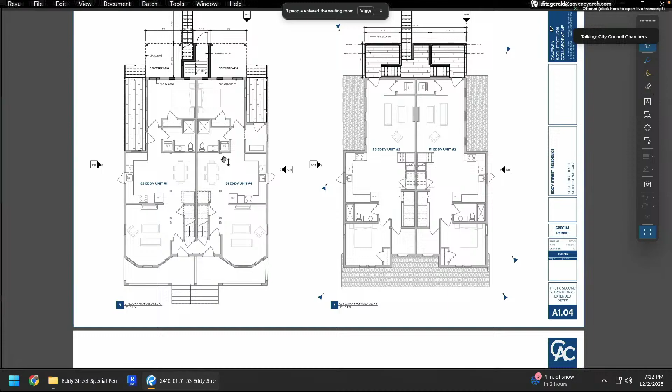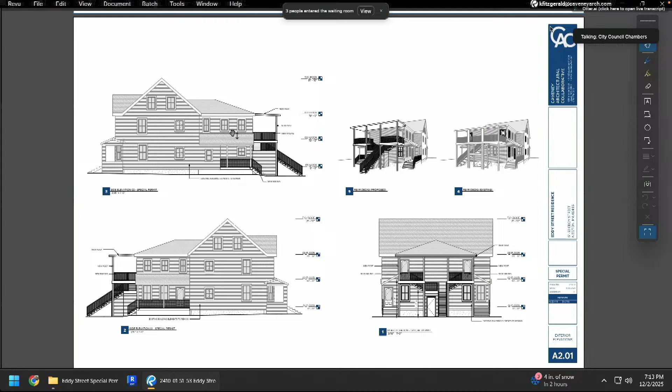As noted in the planning materials, the decks are located at the rear of the house with limited visibility to the street. Therefore, the changes will not substantially be more detrimental to the neighborhood than the existing structure. The proposed work fully complies with the dimensional standards for the zone, including setbacks, lot coverage, and open space. By modernizing these egresses and creating private outdoor space, we believe the project serves the public convenience and welfare by improving the quality of housing for the tenants of the house.

Here's an example of what the existing decks looked like. And then up here is what we're proposing on the left side.

We respectfully request your support for this special permit to alter and extend the non-conforming use.

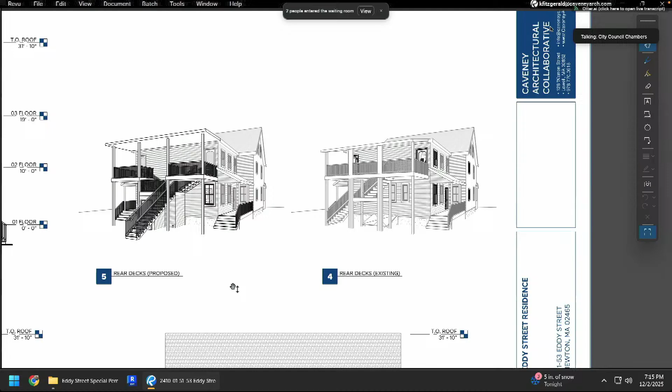And then a motion to approve. Could we take a look at the findings and conditions, Ms. Kemet? I was muted. I believe you should be able to see that now, hopefully.

Thank you. So for findings, we have one: the proposed extension of the non-conforming use will not be substantially more detrimental than the existing non-conforming use is to the neighborhood, because the work will comply with applicable dimensional standards. The decks will be located at the rear with limited visibility from the street and are unlikely to have a more negative impact on abutters and the surrounding area than the existing rear deck.

And for conditions, we have our standard conditions here referencing plans, which is the site plan and the architectural plans. Standard building permit conditions requiring a recorded copy of the special permit and sign off from planning. And we will review again at occupancy for the building permit to certify compliance with the plan referencing and requiring a final as-built. And that concludes that. Thank you, again very straightforward.

Councillor Wright: just one question. I'm trying to look on the website and stuff. So this is 348-25, and when I look in the Friday packet, I didn't see the draft council order for that. It's also helpful when they do the draft council orders to put the address on it. Oh, it's in the compiled memo then, I guess.

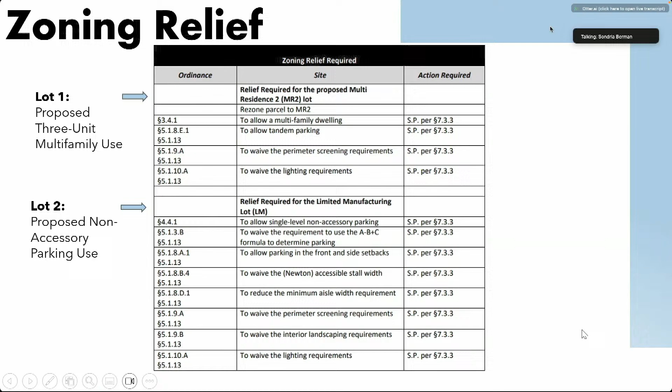So our criteria, again, to consider in reviewing the proposal for Lot 1: we have the standard 4 criteria for special permits, which is that the site is an appropriate location, that the dwelling as developed and operated will not adversely affect the neighborhood, that there will be no nuisance or serious hazard to vehicles or pedestrians, and that access to the site over streets is appropriate for the types and numbers of vehicles involved, and that literal compliance with the required parking stall design standards for Lot 1 is impracticable due to the nature, use, location, size, width, depth, shape, or grade of the lot, or that the exceptions would be in the public interest.

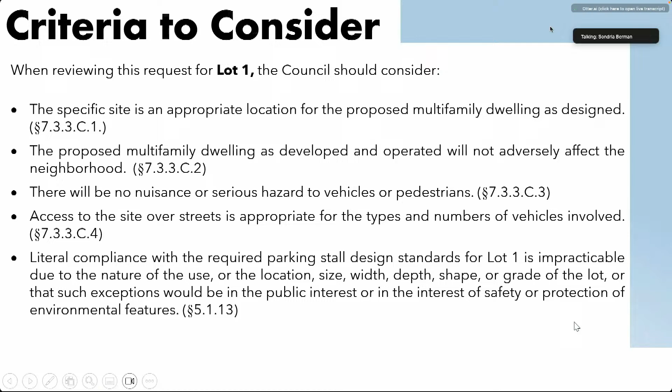In addition, continued for Lot 1, that compliance with the lighting requirements for parking facilities over 5 stalls for Lot 1 is impracticable, and that literal compliance with the landscape requirements for perimeter screening for parking facilities over 5 stalls in Lot 1 is impracticable as well.

Criteria for Lot 2: we have the same 4 standard special permit criteria, that the site is an appropriate location for the proposed non-accessory parking use, that the proposed non-accessory parking use as developed and operated will not adversely affect the neighborhood, that there will be no nuisance or serious hazard to vehicles or pedestrians, and that access to the site over streets is appropriate for the types and numbers of vehicles involved.

There's some additional criteria as well, that literal compliance with the dimensional parking requirements for accessible stalls for Lot 2 is impracticable due to the nature, use, or location, size, width, depth, shape, or grade of the lot, or that the exceptions would be in the public interest.

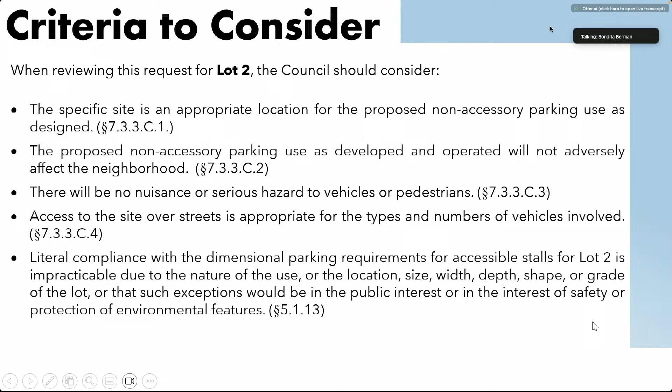Again, literal compliance with the parking regulations for Lot 2 is impracticable due to the use or the location, depth, size, width, or grade of the lot. Literal compliance with the lighting requirements for parking facilities over 5 stalls for Lot 2 is impracticable. Literal compliance with the landscape requirements for perimeter screening for parking facilities over 5 stalls for Lot 2 is impracticable, and literal compliance with the interior landscape requirements for Lot 2 is also impracticable.

In terms of planning's analysis on the rezoning, the zoning history of the neighborhood surrounding 41 Farwell Street reflects a mixed-use area. It was initially residential in the 1920s before becoming a manufacturing district in the 1930s, and then ultimately becoming a limited manufacturing parcel in the 1990s that was surrounded by higher density residential zones.

A rezoning for Lot 1 from LM to MR2 would bring it into conformance with the abutting MR2 district to the north, south, and east, whereas the current LM zoning is not found anywhere in the area. A rezoning to MR2 would provide an opportunity to develop multifamily residential housing in conformance with other residential housing abutting the property to the north, supporting the goal of smart growth to increase housing diversity and supply where possible, per the city's comprehensive plan.

In terms of special permit relief for Lot 1, the proposed multifamily use is appropriate for the neighborhood, which includes an abutting MR2 district with residential 2, 3, and multifamily residences. The multifamily use will not adversely affect the neighborhood or create a nuisance or serious hazard to vehicles or pedestrians, as the project meets the dimensional setbacks of the lot while creating additional low-density housing. The proposed project complies with density restrictions, including lot area and lot area per unit.

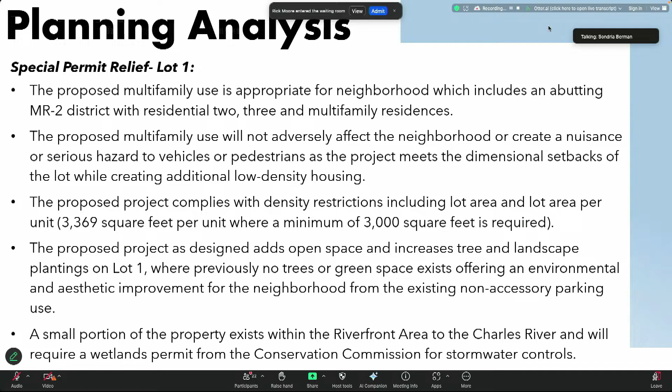The proposed project as designed adds open space and increases tree and landscape plantings on Lot 1, where previously no trees or green space existed, offering an environmental and aesthetic improvement for the neighborhood from the existing non-accessory parking use. Finally, a small portion of the property exists within the riverfront area adjacent to the Charles River and will require a wetlands permit from the Concom.

In terms of special permit relief for Lot 2, the proposed non-accessory parking use of 32 stalls is appropriate for the site and neighborhood, as it remains the same as the existing use and will continue to provide abutting businesses with parking. The proposed non-accessory parking use will not adversely affect the neighborhood or create a nuisance or serious hazard to vehicles or pedestrians, as the project will include infrastructure and landscaping improvements to the lot and include parking stalls that meet the standard zoning dimensions of 9 by 19.

The requested relief for landscaping waivers is due to the irregular shape of that lot, which precludes adequate spacing for the prescribed interior and perimeter landscape requirements. We do recommend further discussion regarding the requested waiver for a lighting and photometric plan on both Lot 1 and Lot 2, to determine if the existing light pole on site is sufficient for safety and security.

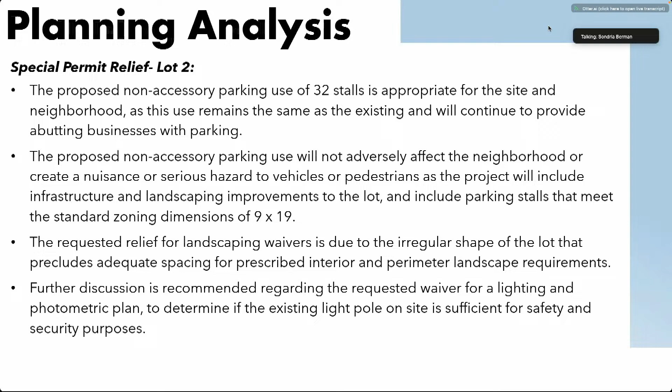I believe that concludes the planning presentation. I will go ahead and stop sharing my screen and turn it back over to you.

Thank you, Ms. Berman. Is the petitioner either in the chamber or on Zoom who would like to follow up with the presentation? As I recall, last time you were here, there wasn't much of a presentation, so we look forward to seeing that tonight.

Yes, my name is Bart Bussink. I am the managing partner of Two Squares LLC, the owner of the property. And Milton Yu, the architect, senior planner, is with us tonight. He will share plans with the council, with the land use committee, sorry.

We feel that the project itself is in conformity with the neighborhood and would be a benefit to the neighborhood. It is a three-unit development, as was stated by Ms. Berman. We expressly designed it to mimic and be in keeping with the architectural...

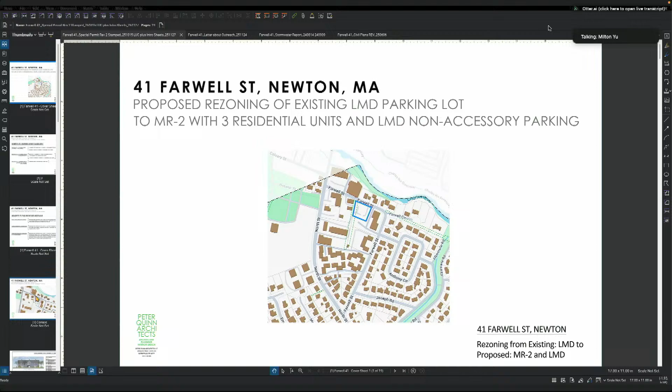Okay. So as far as the actual design of the architecture, that has not changed since the first land use committee. What we mostly responded to was the questions councilors had in terms of the rezoning and the neighborhood.

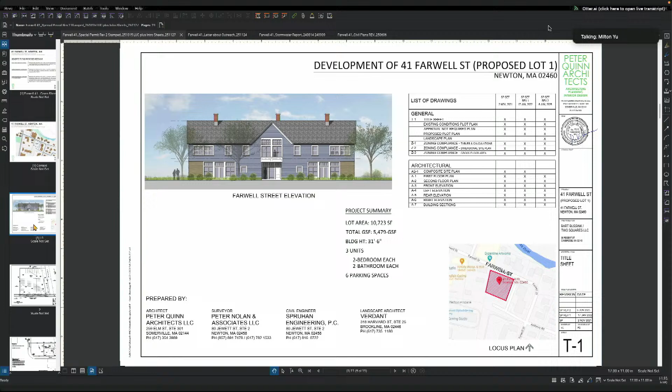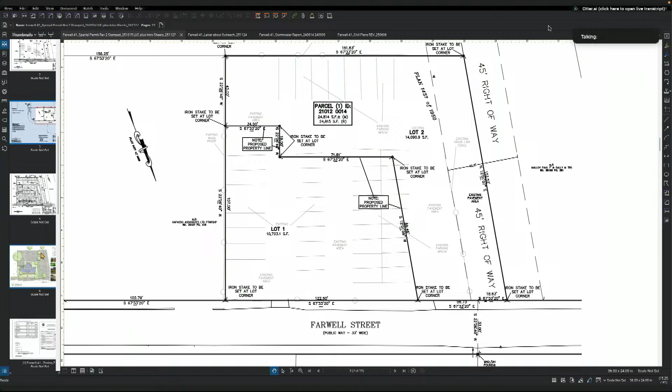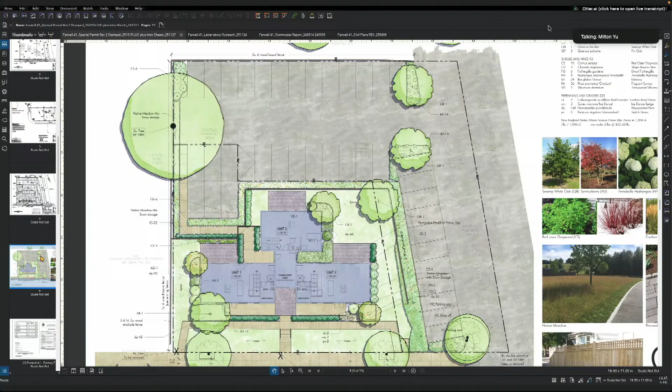Each unit will have its own outdoor space and screening as we showed here. We also have an accessible walkway toward the front. Parking will be 2 tandem spaces per unit, and the remaining 32 spaces will be non-accessory parking to remain.

I'll go over the total changes in terms of before and after. So for the existing lot, we have 51 parking spaces, 46 striped and 5 not striped.

You have 21 leased for parking only, which gives you 30 spaces available for 26 Farwell. If you subtract the 27 used by Farwell from those 30, you have 3 available for others.

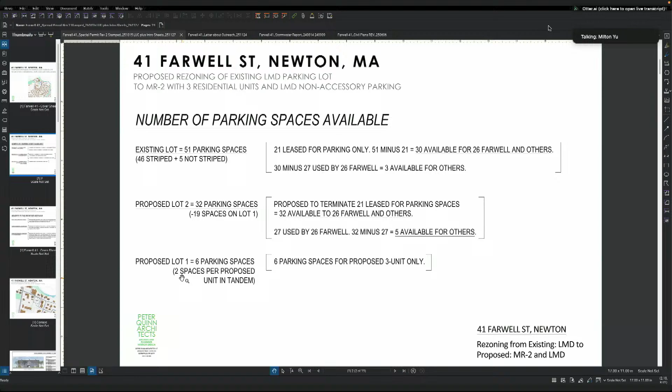That's the existing condition. The proposed condition is to have 32 parking spaces, 19 less. After termination of the leased parking spaces, that gives you 32 available for 26 Farwell and others. 26 Farwell only uses 27, so that's 5 available for others. The new MR zone would have the required 6 parking spaces for the 3 units.

As far as the overall benefit to the rezoning, you have a reduction of impervious surfaces. Right now it's an asphalt parking lot. The proposed MR2 portion of the lot will allow for residential use, such as the 3 units proposed, which will significantly reduce the amount of impervious surface and increase landscaping on the site.

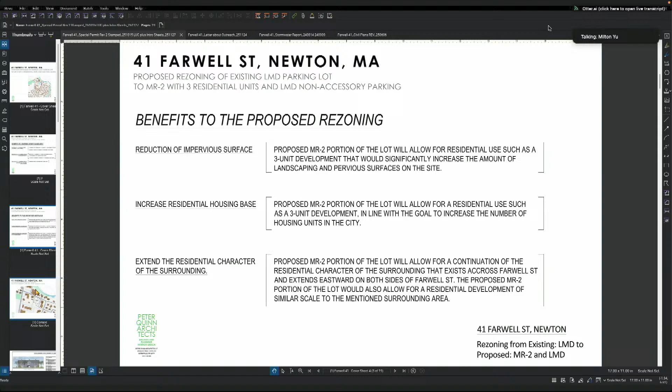The proposed 3 units will also increase residential housing in the city. The proposed MR2 portion of the lot will also allow for a continuation of the residential character, which I can point out on Google image in terms of what the rest of the residential stock is along the area.

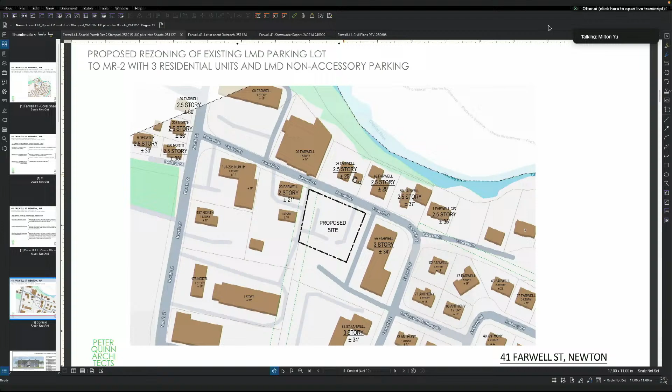Here's a contextual map to help people. In terms of the proposal, we have 2.5 stories. We also have 4 2.5-story houses right across the street: 34, 46, 50 Farwell, and 1 Farwell Circle. We have 2 3-story apartment buildings directly adjacent to our lot, as well as some other 2.5-story lots further down Farwell, but also one directly across from our site.

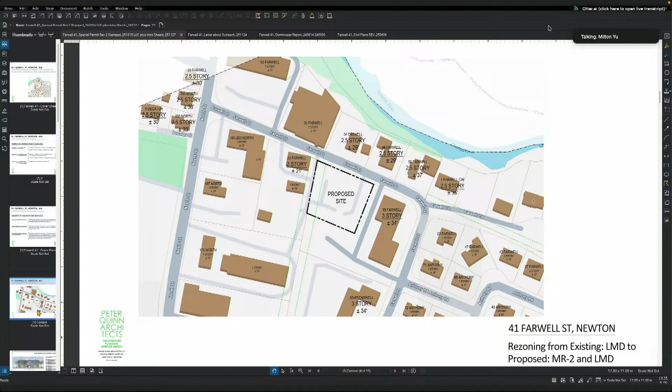In terms of what we wanted the character of the building to look like, we have a front elevation here. This centralized facade with the center gable is taken from what we have across the street.

So that's the parking lot of our site. Directly across the street, that is mostly the facades we were trying to draw inspiration from, with the symmetrical facade and central gable end here, and here. And these are the 3-story apartment buildings.

We're not seeing those photographs, or at least I'm not. We're still on the front elevation. If you were trying to move through other elevations or renderings, we're still stuck on that A3 plan. Sorry, okay.

Let's do that again. Okay, our lot is here. No, you're not sharing your screen anymore. Here we come, thank you. So that's our parking lot.

Okay, thank you, subject lot. And across the street, I was trying to point out the buildings we were drawing inspiration from for our facades. Right, now we see it. Central gable ends, this one and this one, in terms of the heights of the buildings. We have the apartment building, 3 stories, directly abutting us, and also even into Farwell Circle.

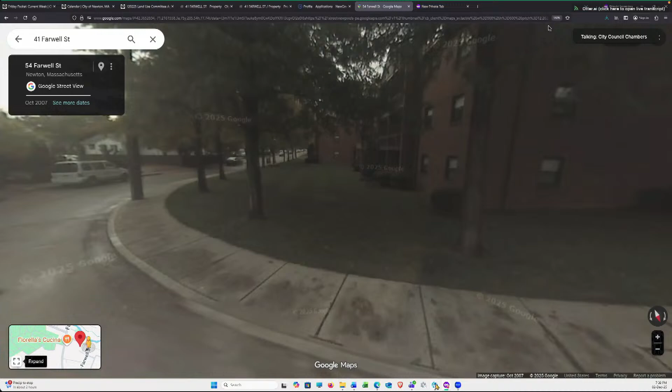While you're showing these photos, can you point out to us where that area of easement or right of way is located that we heard about at the last meeting? Sure.

This is it right here. So as far as my understanding, the easement and access to the easement will not be changing with our proposal.

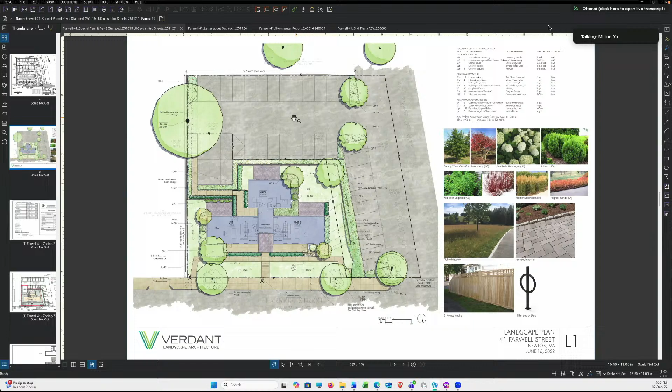Do you see the plans now? Yes, thank you. Okay, so this drawing will indicate it. This right of way, the shared right of way, will remain. The parking spaces that we're proposing access through lot 1 to the 6 parking spaces for the MR2 here.

So this is all what we saw before. None of this has changed at all—the design, the architecture has not changed. But we brought more introductory information about the surroundings and the overall effect of the parking, to give some context. The plans for the structure, the parking lot, and the landscaping are all the same as before.

We also had some comments about seeing our building more. We had these elevations—the front elevation is designed to mimic what was across the street. From the side, we want to show a breaking up of the massing. Keep in mind that this part of the building is set back much farther, and the change in roof line is meant to show a smaller massing.

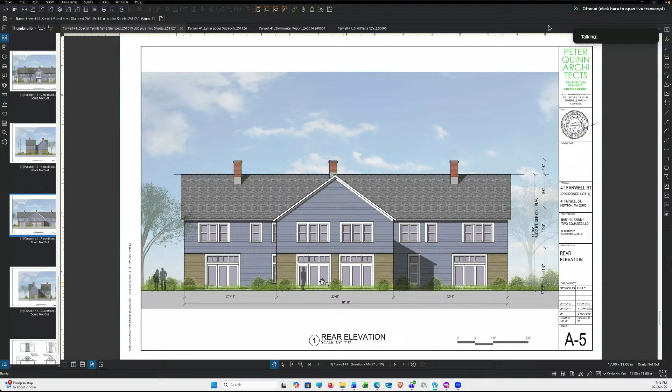There's the rear view. So this is the one unit in the back, two in the front. These show the patio doors for each unit. All set? So with that, if you have any questions.

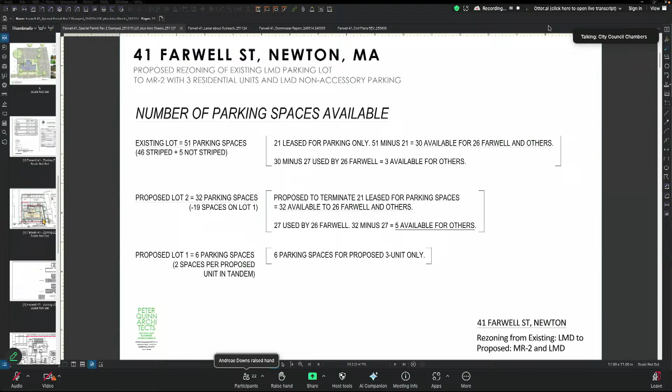Is there any access—I know you're near the Charles River, but you're also in a lot of parking. I'm just trying to think about how families or children would get around. I wasn't clear on the amount of any outdoor space that came with the units, or how people would maneuver around the outside of the building to either get to a play space or access their vehicles. Could you give me a little more detail on that?

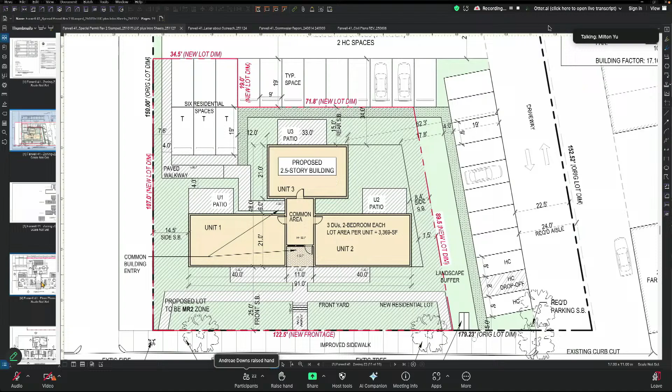I can speak to that. There's a common shared space between the units that can lead directly to the parking area, and also to the street in the front. The private patios are accessed directly from the patio doors from each unit.

I'm sorry, I couldn't hear what you just said. The patio spaces are accessed directly from the patio doors from each unit on their ground floor. Oh okay, okay. So there's a common paved area at the beginning, middle, and then each unit has a paved patio, but there's no outdoor open green space? Is that what you're saying?

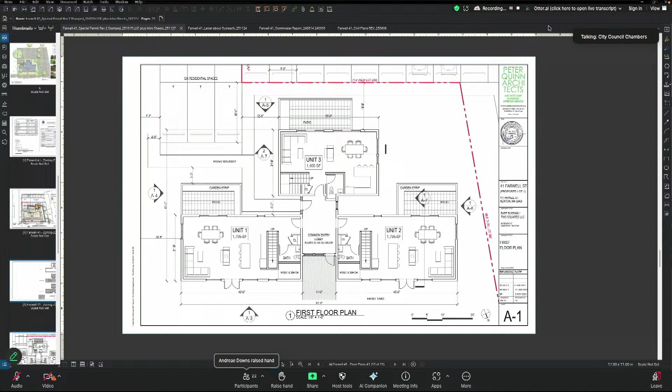There is connected green space as well around each patio. It looks like the green space is pretty limited, and maybe it's nice to have that space for trees or plants or flowers, but it's not really a space where children would play, is it?

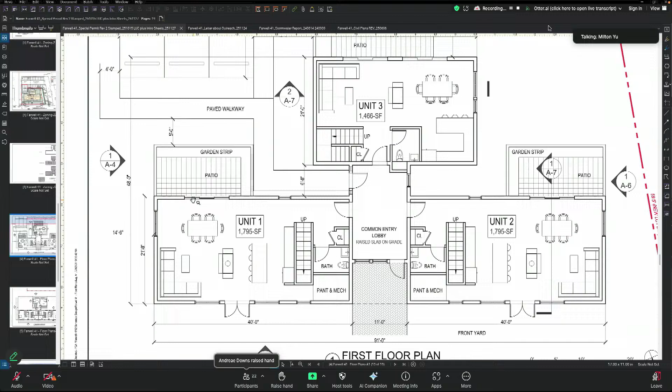Could be, I would say. I mean, they're not tiny spaces. Milton, do you have the dimensions? Let's see—they're probably in the order of 8 by 16 for the patio space, and then the setback ranges from around 15 feet of green all the way around.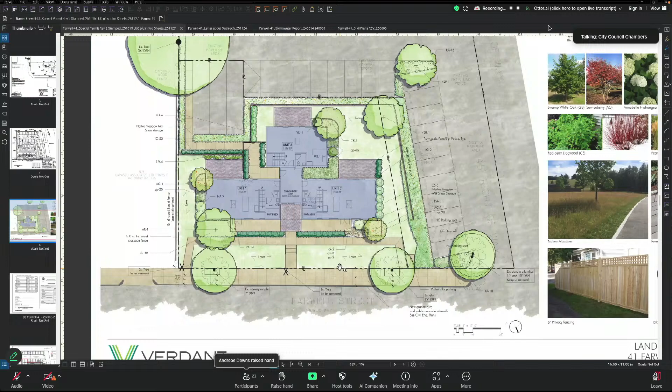And you're improving the sidewalk on the front, correct? We actually don't require—to the extent we're disturbing it, we will be required to maintain it, but we're not proposing changes to the sidewalk. Oh, I thought it said improved sidewalk on the front in your rendering. But you're saying that if there's any damage to the sidewalk during development, once it's completed, you would fix it? I think that would be a standard requirement, but I'm not familiar with the condition of that sidewalk.

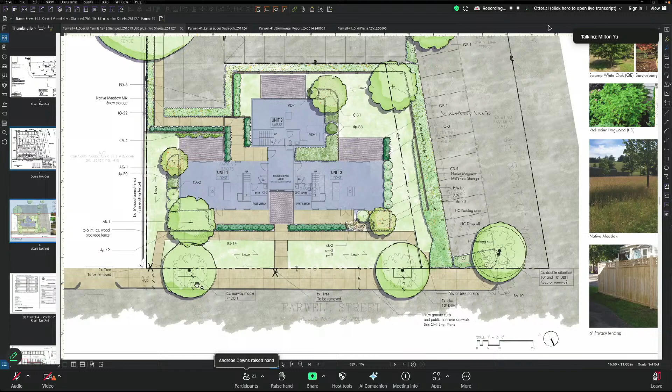Oh, I'm sorry—the landscape plan also shows new trees planted in the public way, just on the other side of the property line. You can see them here, with respect to the sidewalk, in the public way. So here, and here.

Did you go through Newton's tree warden for approval or permission to do that, or how did you decide to do that? I believe that's a separate permit that needs to be sought. It's not essential that those trees be in the public sidewalk—they can be moved a foot or two towards the building and be on our property. It would be helpful if you coordinated with our tree warden around any trees you're putting in a public space. Absolutely, that would be required.

So are these your definitive plans? Because if you haven't yet talked to the tree warden, I would want to hear definitively about where everything is going to be. Sounds like things are still up in the air. But why don't I let some other councilors weigh in? Thank you very much. Thank you, Councillor Leary.

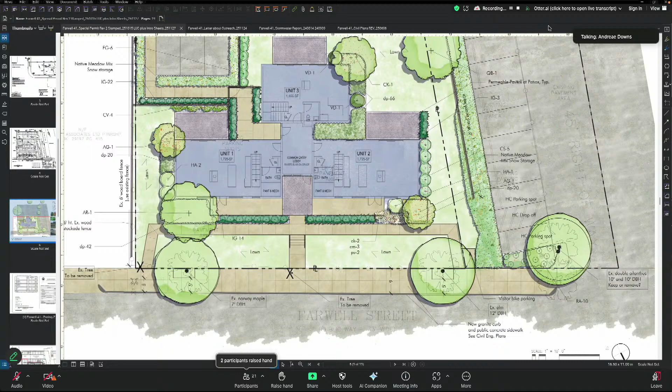Thank you, Chair. I'm actually pretty enthusiastic about this project. You've got a parking lot, and instead you'll have 3 homes here in an area of Newton that doesn't look like a lot of the rest of Newton, at least not on that side of the street. On the other side, it looks a little bit more typical. It's in easy walking distance of Albemarle Road, which has Cheesecake Brook running through it, and an easy walk to the middle school, playing fields, playgrounds, and preschool. It's even closer to the Charles River Greenway along Farwell Street or Farwell Circle, which is lots of outdoor access, assuming the Charles doesn't flood like it sometimes has. And it adds a little more housing here.

I don't think, colleagues, that we should be in the business of ensuring that non-conforming neighbors have parking they've gotten used to or have been paying to use in lots that might be redeveloped to a higher and better use that would bring us additional housing and tax revenue. I think that's a way to tie yourself up in knots. We know that the more parking you provide, the easier it is, the more likely those cars are driven, therefore the more traffic. So I'll just point out this is going to add 3 more units of housing, and it's going to look a lot better than what's currently there. Usually our criteria aren't whether we can get mitigation out of a small development, but whether this is better than what is there now, and whether it will add to the neighborhood. I think the answer here is an emphatic yes.

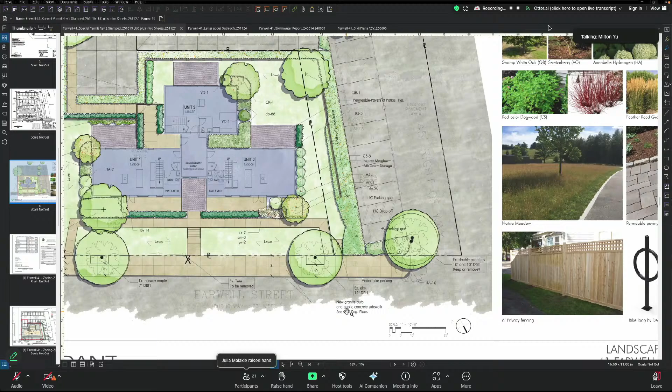Councillors Leary and Malakie were asking what the note that said improved sidewalk was referring to, what improvements did you intend, not just repair of damage you caused, but what improvements were intended? Yes, I do see that. The plans do call for new granite curb and public concrete sidewalk. But we don't have much more detail than that at this point. Well, that's different than repairing damage, a new concrete sidewalk and granite curb. Sounds good, thank you for looking that up.

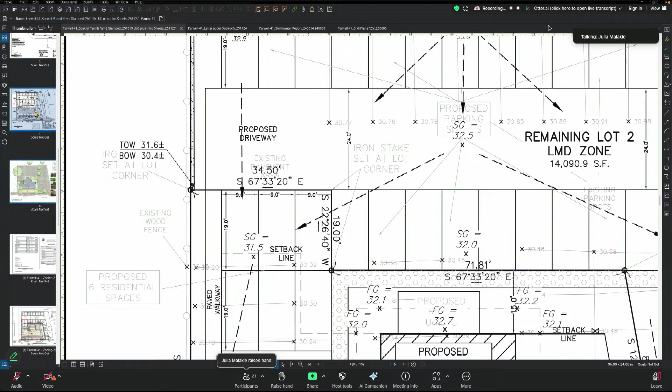Councillor Malakie, keep going. Right, and I guess you would need to do that because you're putting in water, sewer, no gas I guess, right? Because this is new construction. So this will be all electric? Right, okay, but you'd have sewer and water lines where you don't have them now, so that would be disturbing the current sidewalk anyway. Yes. Okay, and I see the 2 large trees that appear to be on the line of the sidewalk, inside the sidewalk. Existing Norway maple, 7 inches, existing elm, 12 inches. So those are going to stay put. Right, those are existing.

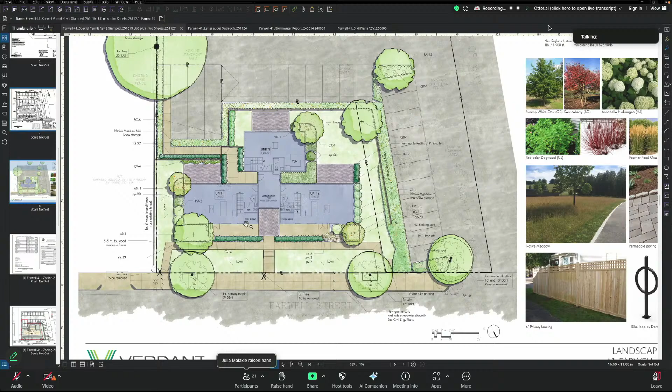And there was a note in the planning memo asking about potential bicycle parking. Is there going to be anything like that? Bicycle parking. We actually do have bicycle parking, it shows up here on the dimensional site plan. It's on Z2, located right off the sidewalk near the walkway, for 2 bikes. Oh, right by the sidewalk. Right. Oh, that's not where I'd want to leave my bicycles overnight if I owned them. Oh, this is meant for visitors. Okay, but there's nothing for residents, and so are there basements to these units or not?

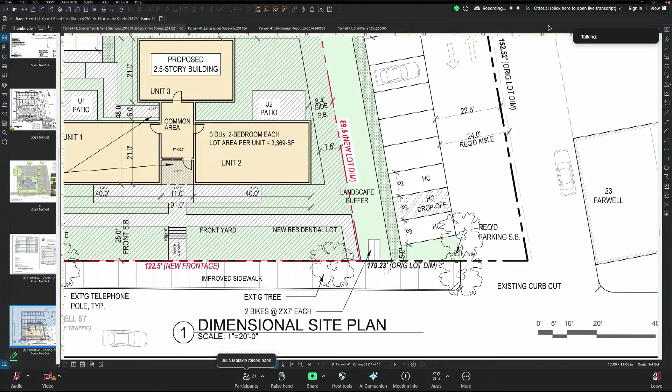No, no basements. So there really wouldn't be anywhere, I guess they could park their bicycles on their patios, that would be the option, or next to their patios on the lawn area. And there was a question about a play area for kids, presumably not the front lawns, but the side lawn that's wider, square and protected, that would be the area. So is the intent for that area to be available to all 3 units, as opposed to just units 2 and 3?

Each unit would have access to the immediately abutting green space. For unit 1, that would be the strip on the side and basically the front yard. For unit 2, it would be on the side and front yard, and unit 3 would be most of the backyard, shared with unit 2 since unit 2 has their patio there as well.

Okay, and these are like over 3,000 square foot units, and they only have 2 bedrooms? No, they're about 1,800 square feet each. Oh, each, okay. I guess I thought I saw 3,000 something in the memo. I guess I was looking at the wrong thing. Okay, all right, thank you.

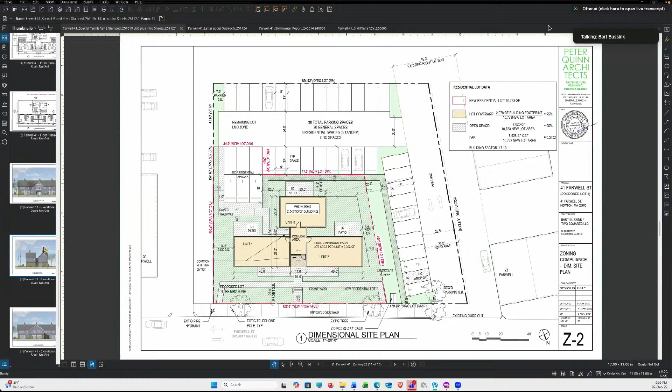What's happening inside to make there be so few windows? There's one window on this whole facade. Interesting. Let's look. What's going on in there that these people who you imagine living here don't want any windows? Well, they have windows, just not along the side wall.

Could you show that elevation again, that right elevation? Sure. So this is the as drawn. I mean, you don't have to put the head of the bed here, but that's where the bedroom is. So there's no window on that facade. And there's one to the right.

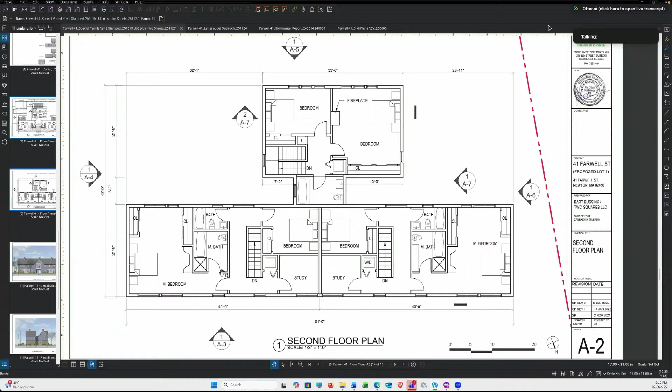So what you're saying is that's intentional because you're giving wall space versus window space. Well, Milton, can you go back to that layout of the room, please? Sure. You'll see, this is the wall in question. And there are windows both on the right and left side of that bed area, quite significant windows actually. Those are visible here. There's quite a bit of fenestration.

I mean, we could look at the front facade. It was just a question. It just looked very unusual to me to have a side elevation like that with only one window. But that was just, I was wondering if that was intentional or a mistake.

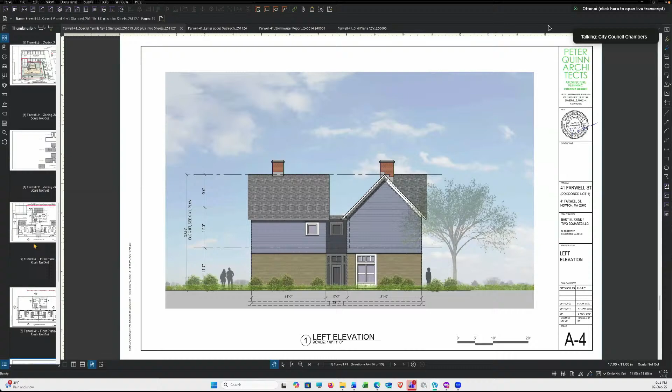Let's move on, it's not really that relevant to what we do here. I agree with some of the comments that were made, particularly by Councillor Downs, that this is an improvement, providing 3 relatively small units of housing in a part of town where it seems an appropriate, better use than a parking lot. I have to just say, as a site planner and landscape architect, it doesn't feel like a very well thoroughly thought through plan, but it is an improvement over what's there now.

Any other comments? Yes, Councillor Leary. Yeah, I just wanted to be clear that I also do believe this is a good project for this site, and it is 3 smallish units. Overall, I would be very pleased to approve this project.

It just seems like no one's very sure of themselves, that's all, and we're used to having solid answers to questions. Thank you. I was thinking you were going to have a more thorough presentation tonight because the last one was rather vague and iffy too, and it still feels a little bit that way to me.

Would any of the councillors like to make a motion on this? This is in my ward and I'm not going to make a motion. Nobody wants to. Councillor Block, I will move to close the public hearing and to approve the proposal. Thank you, Councillor Block. All in favor of closing the public hearing, please say aye.

Aye. Oh, before we do that, do you gentlemen want to, did you come for this project? Do you want to speak to this? No, okay, I just want to be sure. It's so unusual to see people come for no reason. The public hearing is now closed and you made a motion to approve, correct? Yes. Great.

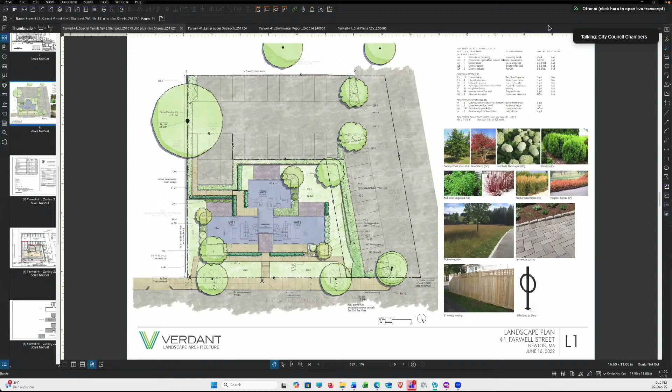Ms. Berman, let's see what you have for findings and conditions. Or would you like to begin first with the rezoning order? Yes, I think that makes sense. Let's start with 306-25, which is the request to rezone. Understood, I'll go ahead and share my screen for that.

And again, this rezoning is just for lot 1. Hopefully everyone can see my screen here. We have the narrative for lot 1, the section, block and lot to be zoned, that is currently zoned limited manufacturing, to multi-residence 2. The lot boundaries are described below. This was reviewed by our GIS coordinator just for accuracy in terms of the ANR plan, to make sure that the coordinates were accurate.

It outlines here the total approximate square feet of Lot 1 as depicted on the ANR plan, here again with the date for the plan. And that essentially summarizes the rezoning order, and it ties in as well to the special permit.

Councillor Block, I'm assuming your motions to close the public hearing and to approve were for both items, the rezoning and the construction, is that correct? Yes, it is correct. I do want to note for the record that we really only discussed the special permit application and not the zoning request, but I realize... Well, that's up to us, if we want to discuss that we could have. No, I realize that, I think we just followed the natural tendency that we have. But I support the zoning change, so my motion does include that.

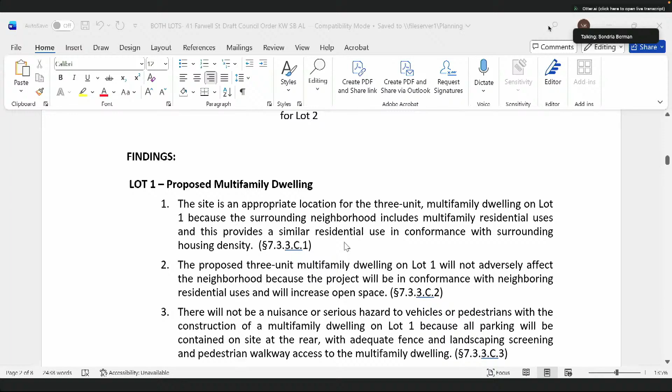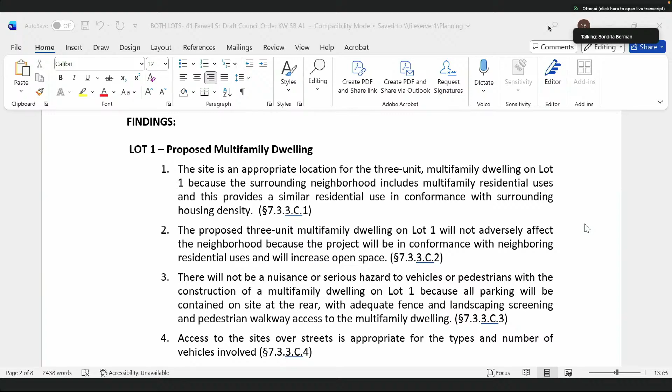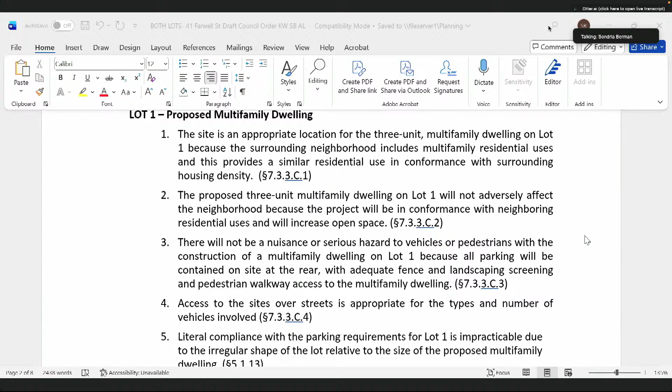...is an appropriate location for the 3-unit multifamily dwelling on Lot 1 because the surrounding neighborhood includes multifamily residential uses, and this provides a similar residential use in conformance with surrounding housing density. The proposed 3-unit multifamily dwelling on Lot 1 will not adversely affect the neighborhood because the project will be in conformance with neighboring residential uses and will increase open space.

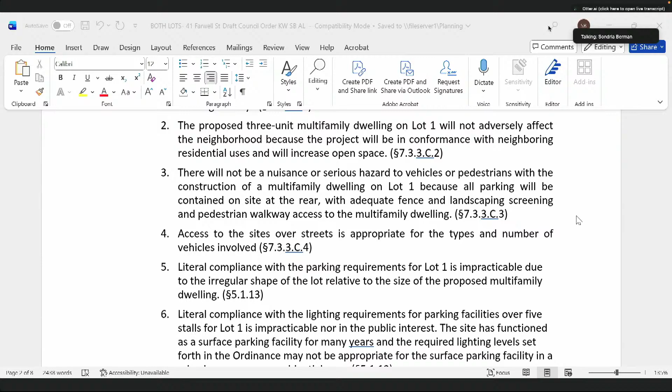Item 3, that there will not be a nuisance or serious hazard to vehicles or pedestrians with the construction of a multifamily dwelling on Lot 1, because all parking will be contained on the site at the rear with adequate fence and landscaping screening and a pedestrian walkway access to the multifamily dwelling. Sorry, I lost my space. Access to the site over streets is appropriate for the types and numbers of vehicles involved.

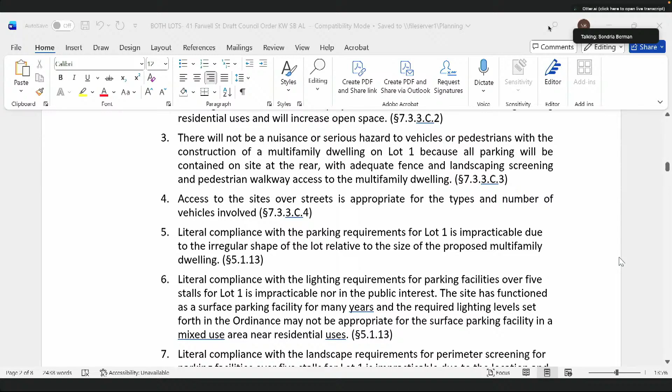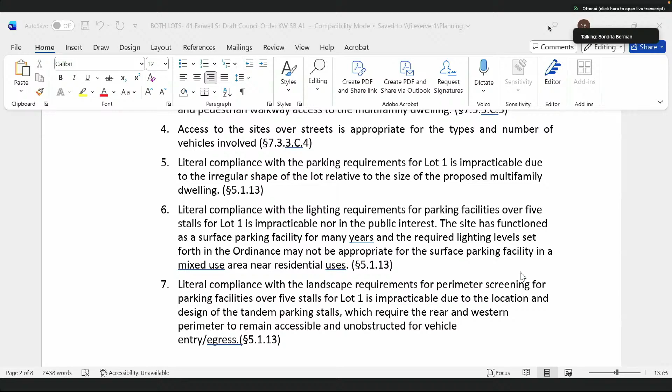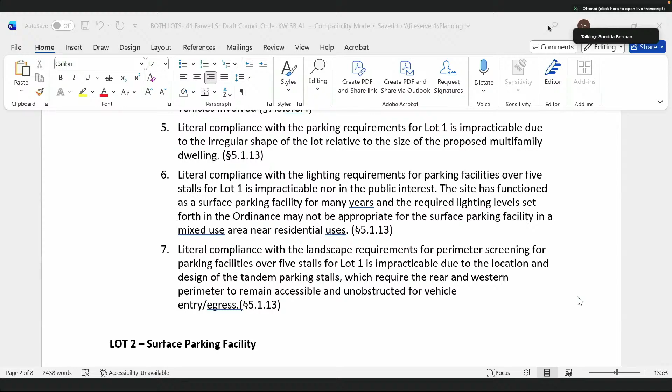That literal compliance with the parking requirements for Lot 1 is impracticable due to the irregular shape of the lot relative to the size of the proposed multifamily dwelling. That literal compliance with the lighting requirements for parking facilities over 5 stalls for Lot 1 is impracticable, nor in the public interest, since the site has functioned as a surface parking facility for many years, and the required lighting levels set forth in the ordinance may not be appropriate for the surface parking facility in a mixed-use area adjacent to residential uses. And finally, item 7, that literal compliance with the landscape requirements for perimeter screening for parking facilities over 5 stalls for Lot 1 is impracticable due to the location and design of the tandem parking stalls, which require the rear and western perimeter to remain accessible and unobstructed for vehicle entry and egress.

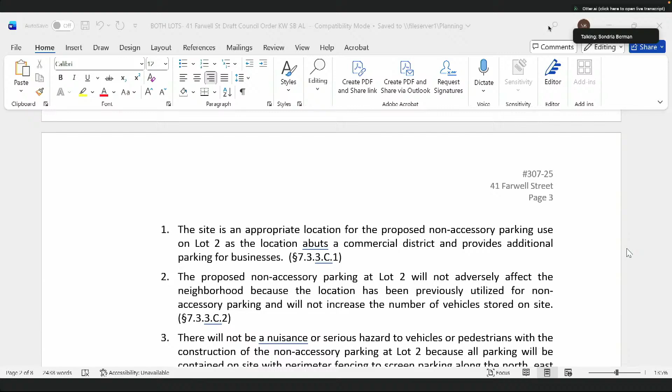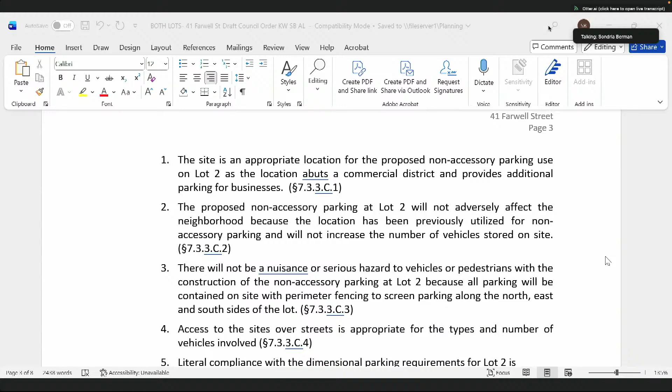Moving on to Lot 2, which is the surface parking facility. We have here that the site is an appropriate location for the proposed non-accessory parking use on Lot 2, as the location abuts a commercial district and provides additional parking for businesses. That the proposed non-accessory parking at Lot 2 will not adversely affect the neighborhood because the location has been previously utilized for non-accessory parking and will not increase the number of vehicles stored on site.

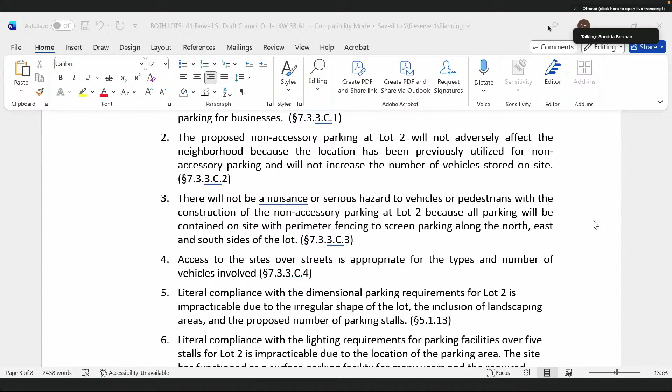Item 3, that there will not be a nuisance or serious hazard to vehicles or pedestrians with the construction of the non-accessory parking lot on Lot 2, because all parking will be contained on the site with perimeter fencing to screen parking along the north, east, and south sides of the lot. Item 4, that access to the site over streets is appropriate for the types and numbers of vehicles involved.

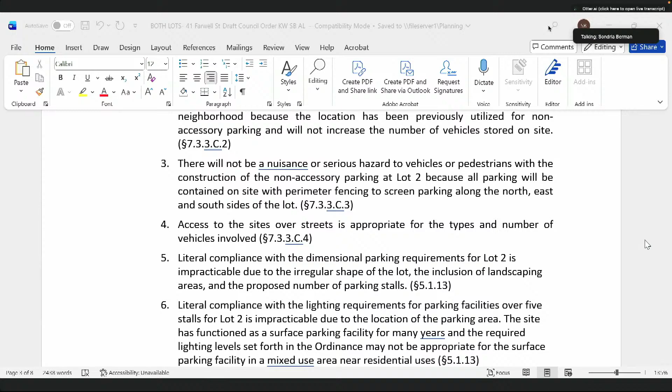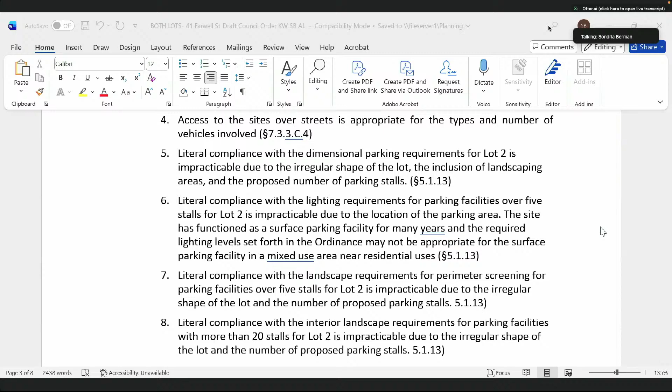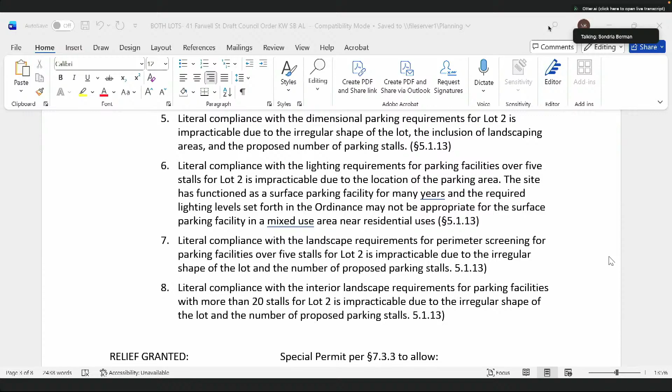That literal compliance with the dimensional parking requirements for Lot 2 is impracticable due to the irregular shape of the lot and the inclusion of landscaping areas and the proposed number of parking stalls. That literal compliance with the lighting requirements for parking facilities over 5 stalls for Lot 2 is also impracticable due to the location of the parking area, and the site has functioned as a surface parking facility for many years, and the lighting levels set forth in the ordinance are not appropriate for a surface parking facility in a mixed-use area near residential uses.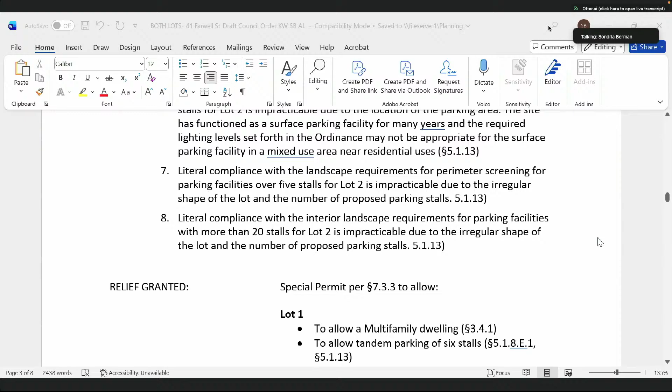That literal compliance with the landscape requirements for perimeter screening for parking facilities over 5 stalls for Lot 2 is impracticable due to the irregular shape of the lot and the number of proposed parking stalls. And finally, that literal compliance with the interior landscape requirements for parking facilities with more than 20 stalls for Lot 2 is impracticable due to the irregular shape of the lot and the number of proposed parking stalls.

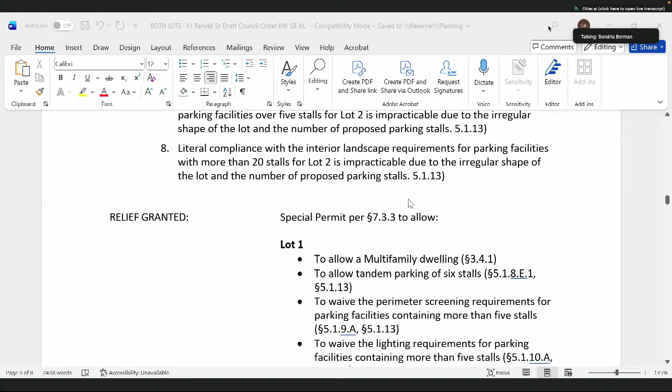We have here outlined again and delineated according to the lot the respective special permit relief for Lot 1 and the relief for Lot 2. We note that the zoning for Lot 1 is multi-residence 2, previously zoned limited manufacturing, and Lot 2 will remain limited manufacturing.

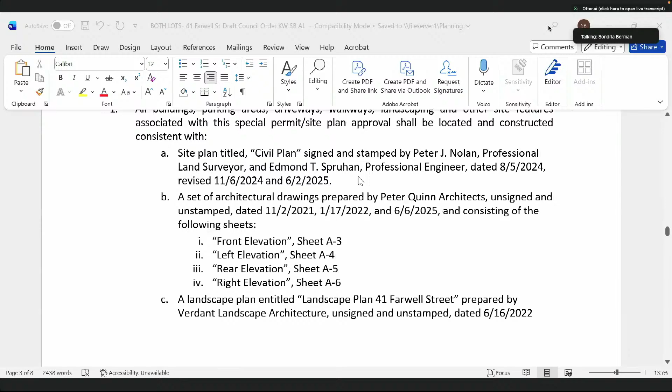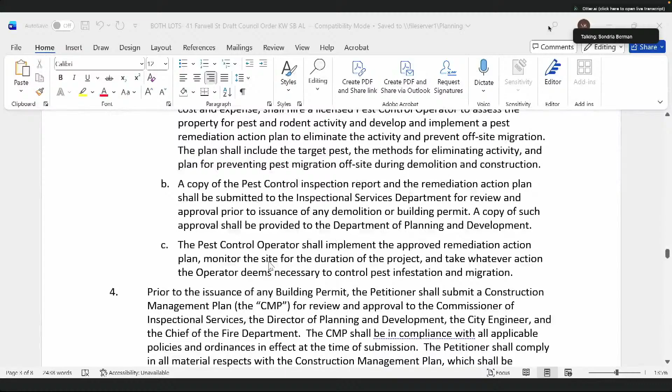And finally, here we have the conditions. Under item 1, the standard plan referencing condition. We included the site plan, architectural plans, and the landscaping plan that was provided, as well as the A&R plan. Under item 2, the standard O&M plan condition. Under item 3, the standard pest control and rodent activity condition. Under item 4, construction management.

Under item 5, we've added this, again I spoke of it earlier. We want this specific special permit to follow both Lot 1 and Lot 2 once the lots are divided in the assessor and also at the registry, to make sure that the special permit is tied to those respective properties included in the relief.

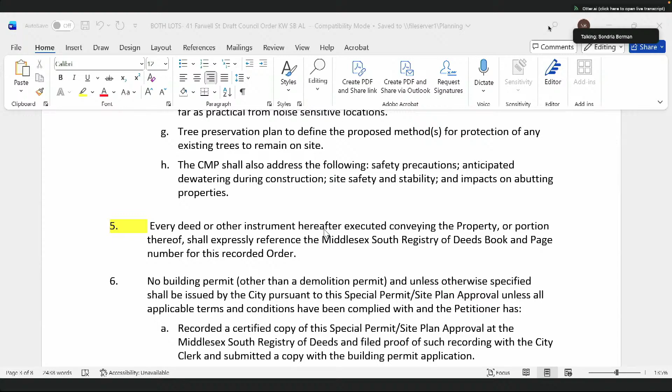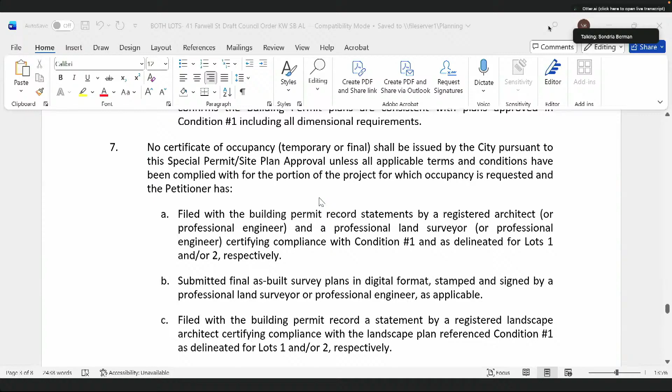We have here, again, the standard building permit condition under item 6. And finally, under item 7, the standard final inspection and certificate of occupancy condition as to what needs to be filed for compliance, that they will also be compliant with the landscaping plan, and that all other requirements under condition 8 are satisfied before they can get their CO from inspectional services.

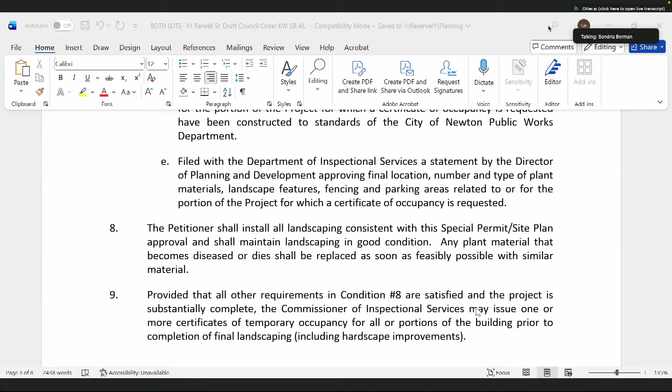So that would conclude the draft order. I'm happy to go back and review anything or answer any questions. I'll turn it back over.

Thank you, Ms. Berman. I don't see any further questions. I think we're ready to take a vote.

Councilor Block, Aye. Councilor Downs, Aye. Councilor Farrell, Aye. Councilor Kelly, Aye. Councilor Leary, Aye. Councilor Lovitz.

Councilor Lucas, Aye. President Laredo: I think I need to recuse myself on this item, so I will. Motion passes 6-0 with 1 absent, 1 recusal.

Thank you. So Mr. Busink, that is approved by the Land Use Committee, so it will next go to the full council. They will vote on it at our next and final meeting on December 15th.

I have a question for you. You're representing Two Squares LLC, correct? Yes, and they own lots 1 and 2, correct. Do they own any other property in this area on Farwell Street? No. Well, okay, 26 Farwell Street, yes.